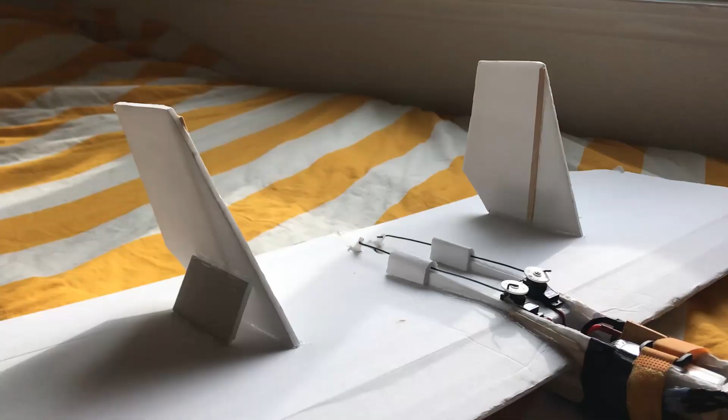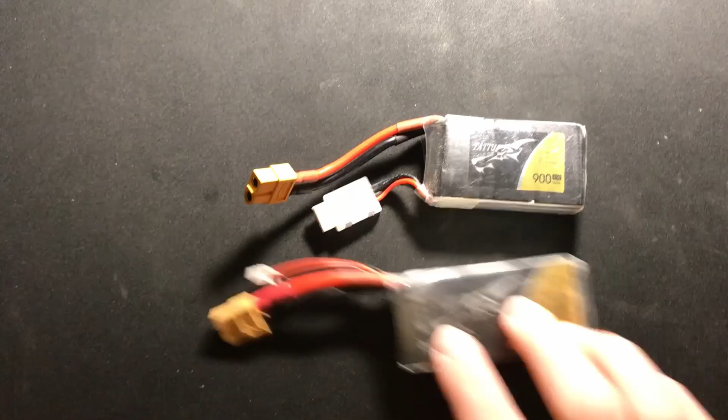This build took me around 7 hours to complete, and here's a quick parts list. I used my standard set of electronics I use for planes this size, which includes 13-gram metal gear servos and a 30-amp ESC paired with a 2205 2300 kV Emax red bottom brushless motor with a 6045 prop. I usually run a 900 or a 1300 mAh 3S LiPo, which supplies more than enough power for unlimited vertical and around 4 to 8 minutes of flight.

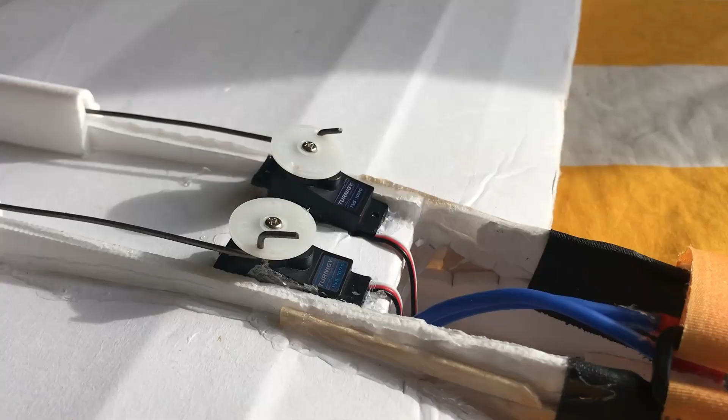Every feature on the plane was implemented for a very specific reason. Firstly, I wanted to make a plank wing because I wanted a plane that I could practice inverted and high-speed flying with, occupy very little space, and be very easy to transport on my backpack.

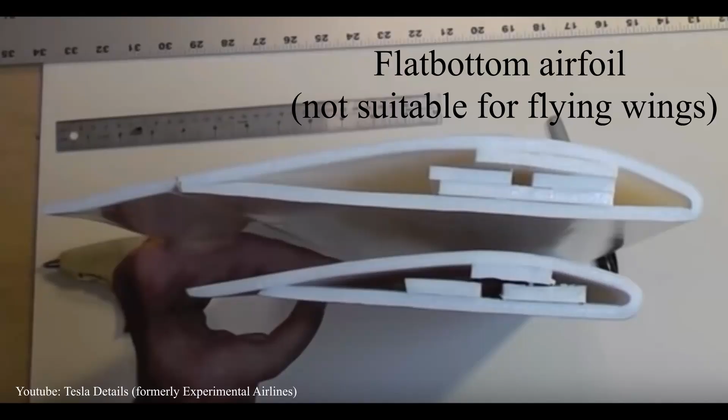I chose to model the custom airfoil off of a PW51 airfoil, as this is a proven shape that is efficient for planks. This was the second time I had experimented with curved bottom airfoils, which offer better stall and flight characteristics than typical flat bottom airfoils, which are easy to make and abundant in the RC aircraft world.

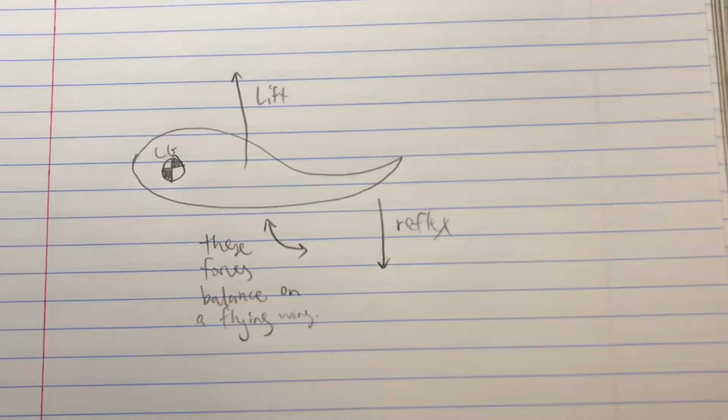I also built in some wing reflex, which essentially creates a turning moment about the wing. The center of lift creates rotation about the center of mass on the plane. Wing reflex therefore counteracts this rotation and helps the plane stay level in the air.

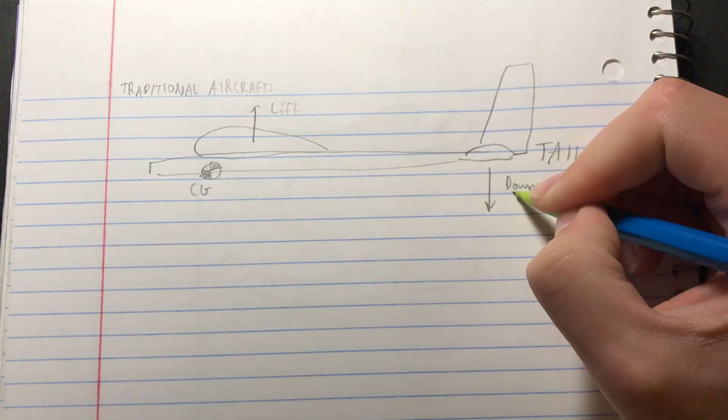On regular wing and tail aircraft, the main wing's airfoil only provides an upward force called lift, and its torque about the center of gravity is counteracted by the tailplane. However, since my wing does not have a tailplane, my airfoil must produce the same effect that a tailplane has.

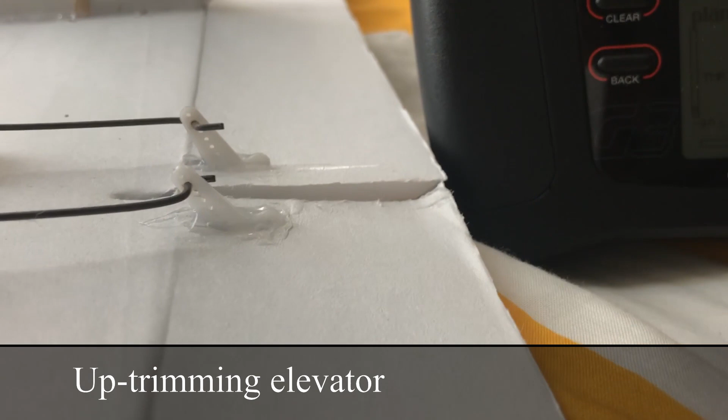In flying wings, wing reflex can be equated to uptrimming the elevator controls, which changes the neutral position of your controls. However, I chose not to do this, because ideally you'd reserve your trim for the actual flight and not the workbench. I chose a tractor or puller configuration for this plank wing.

This means the motor is mounted at the front rather than the back of the plane. Pullers are quieter because, unlike pushers, they do not encounter turbulent airflow from the wing.

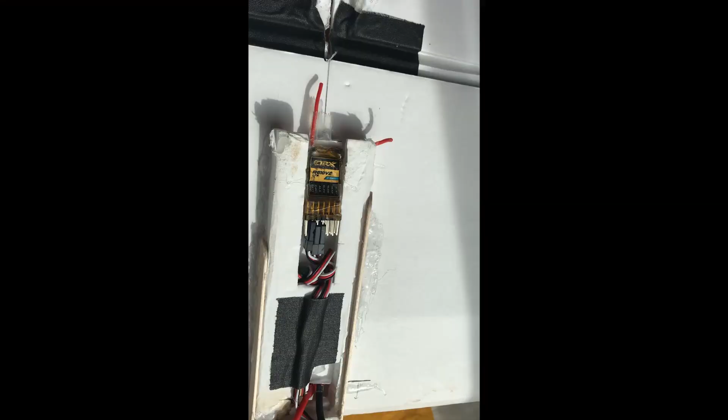For me, noise was an important consideration, as I would be flying in parks and other locations that are sensitive to noise. If you're familiar at all with radio control wings, you'll notice that they're 99% pushers because they usually house camera equipment in the nose.

However, I wanted as much weight up front as I could possibly manage, as well as the ability to have full span elevons for increased maneuverability.

In flying wings, elevons act as both the elevator and the aileron, hence the name elevon, and help the plane to both pitch and roll. Larger elevons mean that the wing can be more responsive in flight because they deflect larger amounts of air and therefore generate larger forces.

You may be wondering why I decided to go with 2 vertical stabilizers. Since there are 2, there is less consequence of misalignment of one of the fins when building the plane.

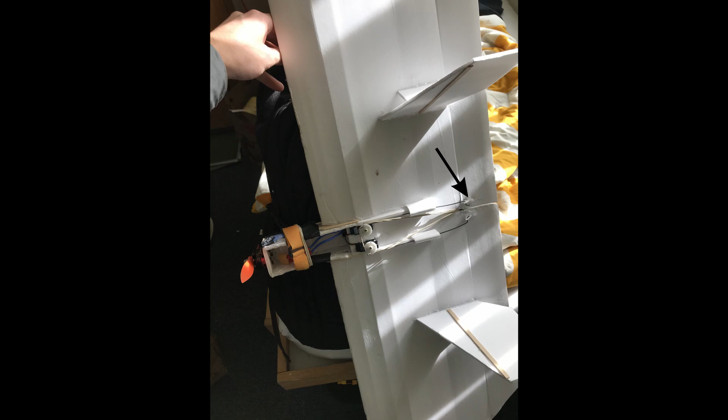In addition, the fins don't block the rubber band slit on the back between the elevons, which is used to mount the wing to my backpack. And I angled the fins at roughly a 15-degree angle.

On many military aircraft such as the FA-18 Hornet or the SR-71 Blackbird, both of which often encounter high angles of attack upon landing, the forward body of the plane can produce vortices of air that flow either into the center of the plane or outward.

This test footage, courtesy of NASA Langley, shows the vortex created by the F-18's nose and cockpit area and how it flows outward away from the center of the plane.

The vertical stabilizers on the F-18 are therefore canted outward to intercept the vortex, ensuring sufficient airflow around the rudder and therefore good yaw authority, which is important for stable flight.

Stealth fighters, such as the F-35, also employ stabilizer canting to reduce their radar signature. But I'm not worried about showing up on a potential enemy's radar.

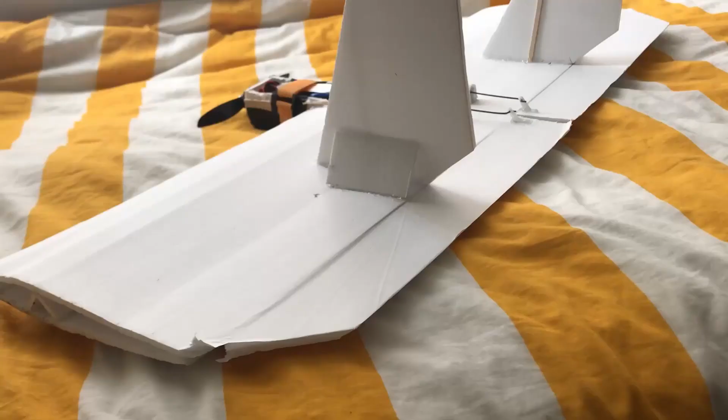And since the wing of my plane has the same airfoil along the span, and since there wouldn't be anything to affect the airflow ahead of the stabilizers, the whole wing would probably not produce any significant vortices around where the stabilizers are located. The whole wing would probably stall at once, and so any angle of cant would not affect the aerodynamic properties. But I implemented the cant anyway because it looks pretty cool.

Lastly, the CG, or center of gravity, on planks is very particular and therefore difficult to get correct. As with all aircraft, the center of gravity must always be ahead of the center of lift of the wing, so the plane can remain stable in the air, similar to how a wind vane works.

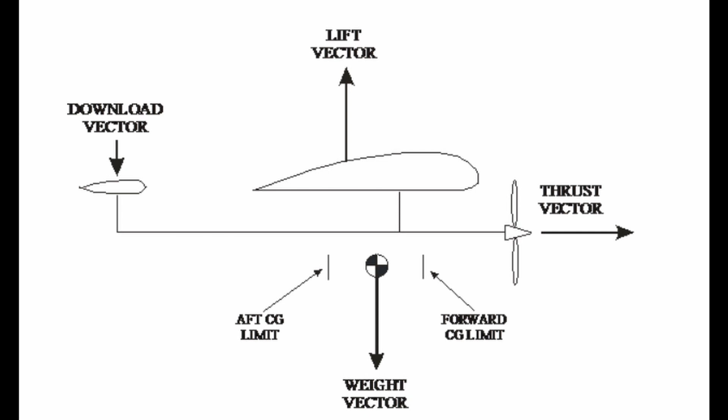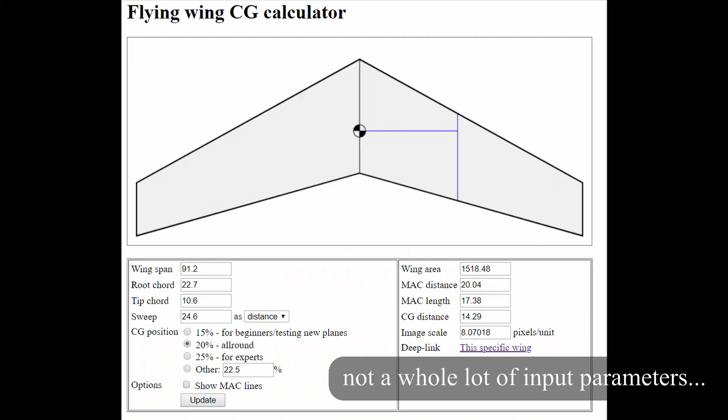Experimentally, however, I found that the range was closer to 0.7 to 1.5 inches. This is probably due to the fact that I prefer slightly nose-heavy planes for stability at high speeds, and because the CG calculator was very simplified and did not take into account the specific airfoil I used.

For the maiden flight, I guessed the best location and luckily it went off without a hitch. And now I'll leave you with some footage of the second ever flight of the wing.

Alright, ready? Yeah.